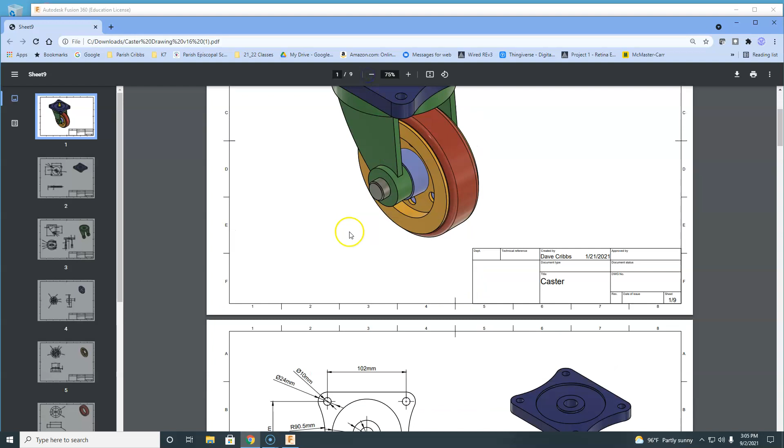All right, this is the third video in the caster project tutorial series. We're going to go ahead, we'll keep moving along. We've already done the plate as well as the frame, and today we'll work on the hub and the rest of the parts.

The hub starts out with just a bunch of circles. There's a 42, a 24, a 60, and an 84. And then there's this ring of circles around that's centered on that 60 millimeter. Those are all 10 millimeters.

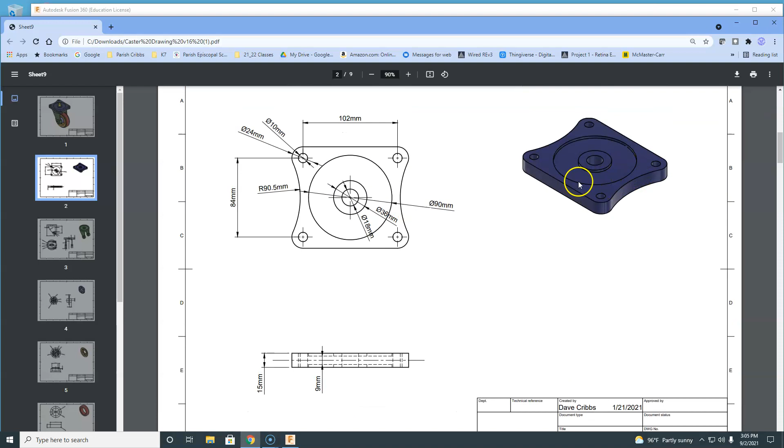So we're going to do a bunch of circles. This piece is more vertical, whereas this top part and these are kind of more horizontal. So instead of sketching on the top plane, we're going to sketch on the front plane.

So I've got my model open where I saved it before. I'm going to go ahead and turn off the visibility to those other parts, hide my data panel. I'm going to remember too that when I'm starting a part, I need to right click and select new component. This will be our hub. Go ahead and hit OK. So my hub is my active component.

Go ahead and hit the create sketch. We're going to use this front plane to sketch on. My first two circles are 24 and 42.

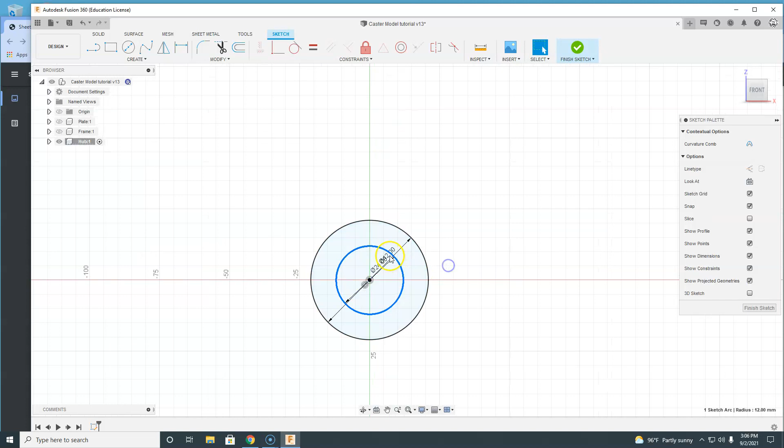So I'm going to use the C on my keyboard to start the circle command. Type in 24 and hit enter. Letter C again, snap it to the origin, 42 and enter. Those are kind of all on top of each other, so I can kind of drag them, grab that dimension and drag it out of the way.

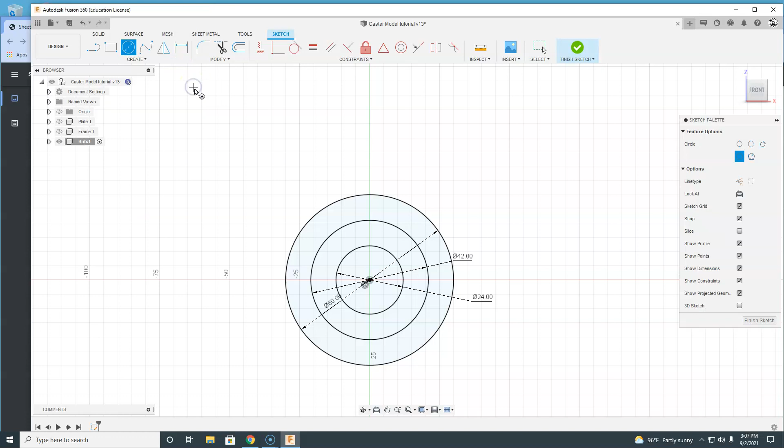Then I've got a 60 and an 84. So C on my keyboard to start the circle command. Type in 60 and hit enter. If you don't want to use your keyboard command, you can always come up here and click on create over the circle and grab it, but you can see it's got a shortcut right there. Center diameter circle is a very common tool. So snap it to the center, drag it out, and then type in 84.

This 60 millimeter circle, I don't actually need this line, I'm just going to use it as a reference. So I'm going to select this line, come over here to my sketch palette, and for line type I'm going to select construction. That'll turn it into a dashed line. The solid lines break up the blue shaded areas, the different profiles, but the construction lines don't. They're just there for reference.

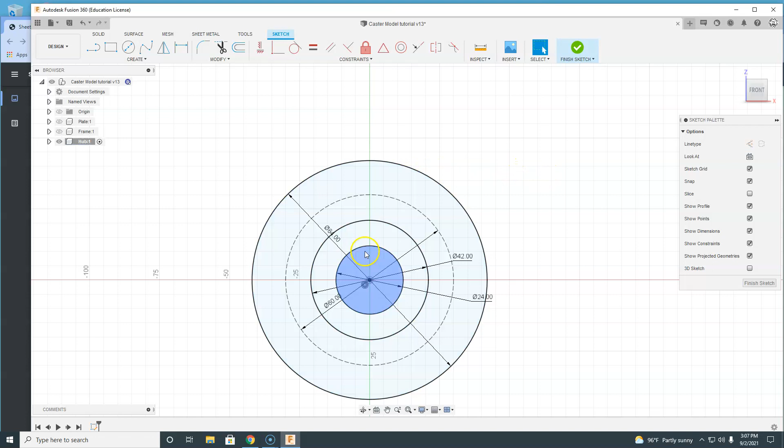I also want a vertical line. I want to put this circle right here, I need to put it straight up and make sure it's at the top of that arc. So rather than just trying to guess, we'll go ahead and put in a line, snap it to the origin, go straight up. You can hit the green check mark. I'm going to hit the escape key to get out of the line tool.

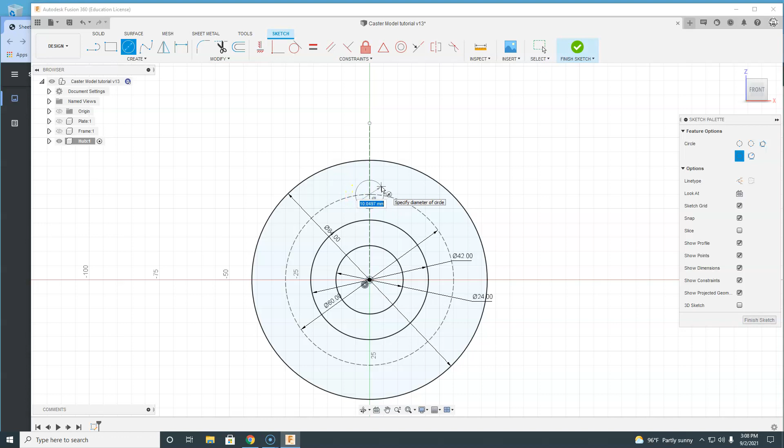I'm going to select this line, turn it into a construction line. That way it's there for reference, but it's not going to get in my way. Hit the letter C on my keyboard for a circle. I'm going to make sure that it snaps not only to this circle, but also to that vertical line. I'm going to drag it out and just type in 10 and hit enter. And that's my top circle.

I've got 5 more, but we're going to go ahead and use a new command. We're going to use the circular pattern tool. It opens up a little dialog box. It's telling me to select my object. So this circle is the object I want. I'm going to select this.

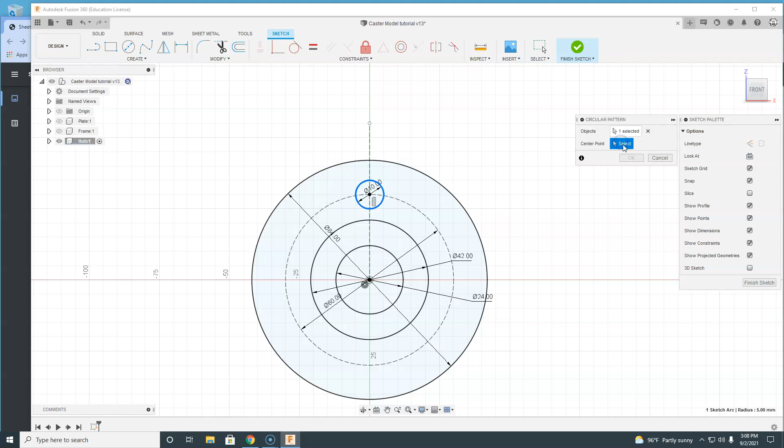So now I need to select my center point as the origin right there. It kind of lights up that circle. Then I've got the option down here that it's going to kind of put in 3 circles, or I can use the up and down arrows, or I can just type in a number. I need 6 of those circles. So I'll go ahead and hit OK.

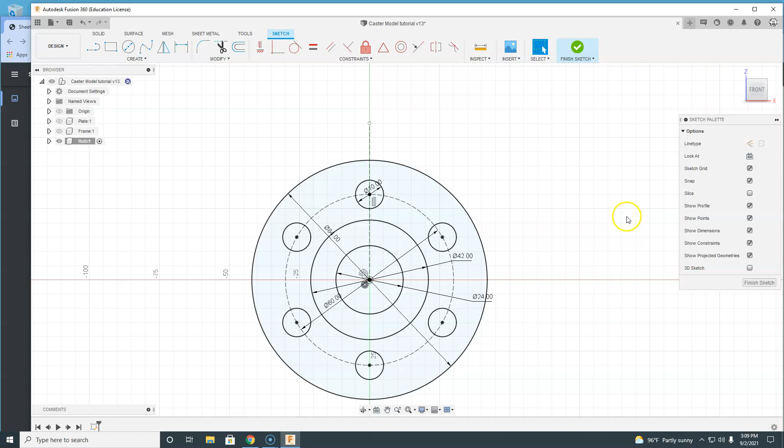Come back over to my view cube, hit the home view so I can kind of get a good perspective view. And when I extrude this, I know the center section is going to be a total of 10, so 5 to the right, 5 to the left. And then this kind of tapered section, and that's what the little 3.5 degree angle is, it's tapered.

It's going to come about 20 from this front face, but my sketch is here in the middle, so I'm going to have to do this 20. I'm also going to have to do half of that 10, from the center out 5 plus 20 more. So this part's going to be 25 from the center, and this will just be 10.

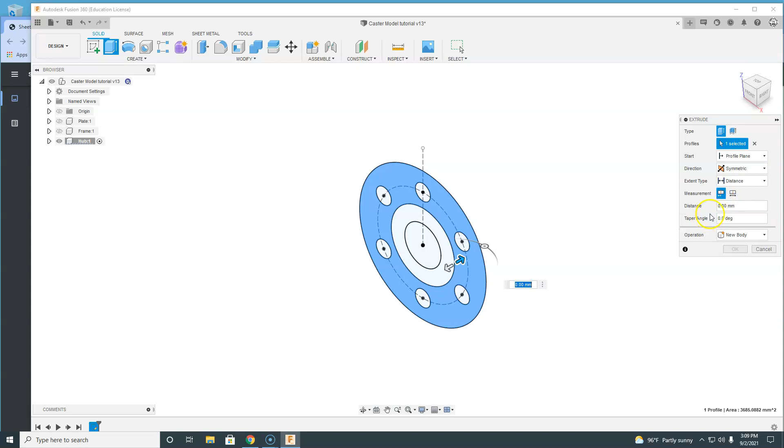Go ahead, start the extrude command. I'm going to grab this outside part, and I know that I want to do symmetric at both sides, and I know that the whole distance has got to be 10. So we'll do that.

Whenever you finish an extrude, it hides the sketch, so we'll just go ahead and turn that back on. Start our extrude tool again, grab that inner circle. That is also going to be symmetric.

And we said the half distance, if you remember, is 20 plus that 5. So the half distance is 25.

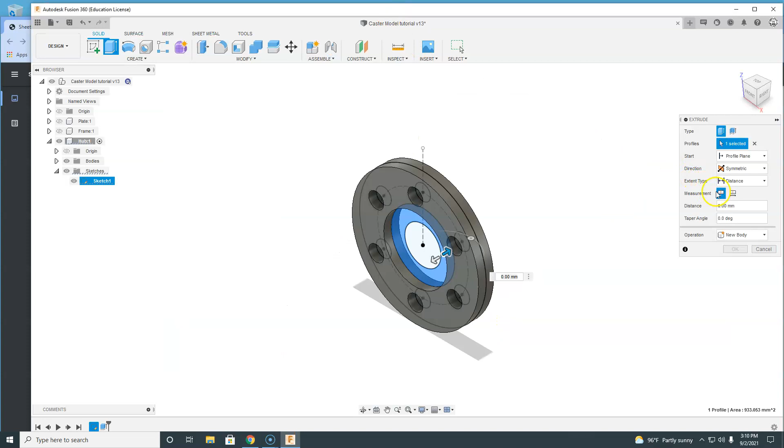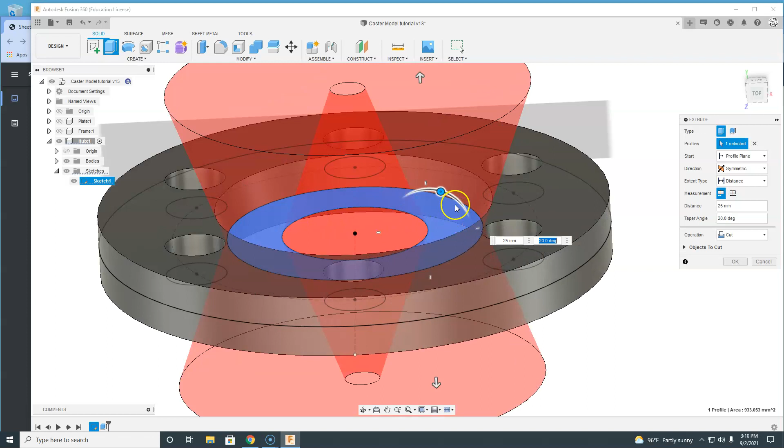And then we also have to remember the taper. If I look at this from the top, you can kind of see if I drag this inward, it gives a different taper. If I drag it outward, it kind of explodes and goes crazy. It's thinking we're trying to cut a hole inside of here, which is not at all what we're trying to do.

So we're going to drag this taper over this way. It's always a little bit tricky to get those things with the mouse, so we're just going to see that it's the negative direction. We're going to type in negative 3.5, I believe, yeah, 3.5 degrees.

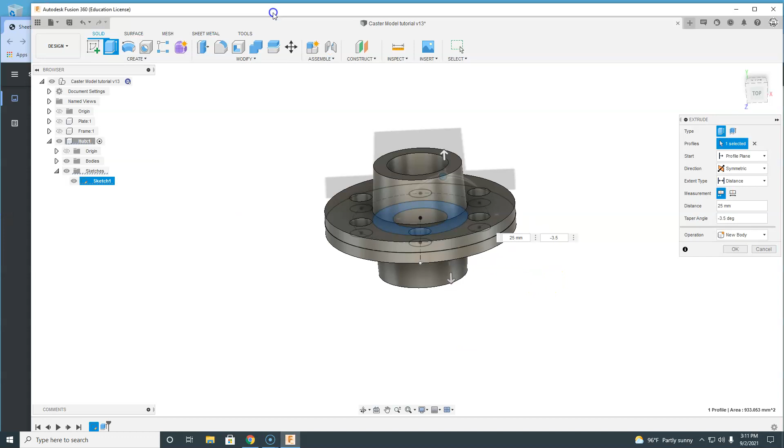So we'll go back to our home view. That looks good. Instead of new body, I'll make sure I select join so that those things are attached to each other. Go ahead and hit OK. We'll turn off our sketch, and that looks good to me.

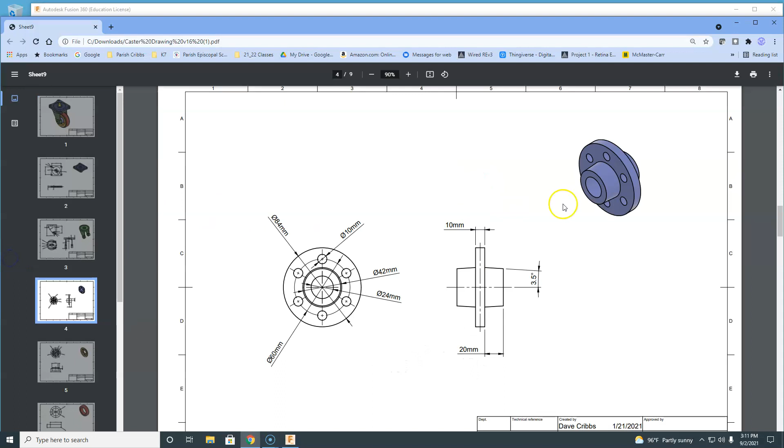We've got, I don't know, some kind of light purple color. So I'm going to go ahead and hit the A on my keyboard, bring up my appearance menu. I got purple because I did it when I was practicing, but you're not going to have that right away.

So I'm going to come down here to glass. Whoops, not glass, paint - glossy paint. And there's no light purple, so all I did is I right-clicked on this blue one. I'm going to duplicate it. It gives me another blue one. Right-click on the new one and hit edit.

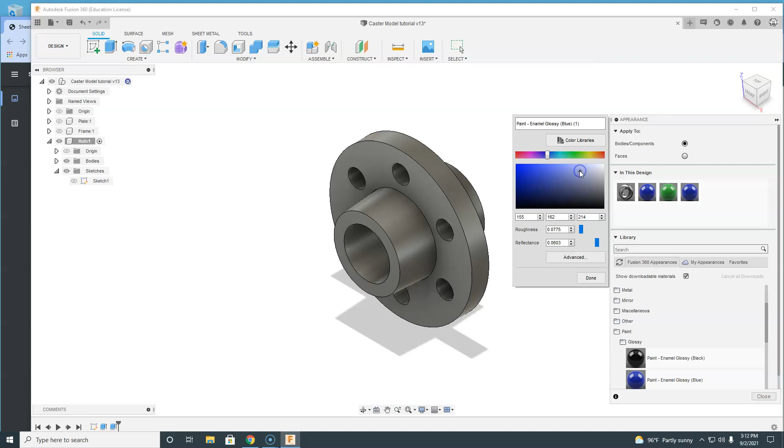And then you can kind of pick whatever color makes you happy, some kind of light blue, light purple, whatever you want. I'm going to hit done. Changes it to that lighter color. This is on bodies or components, so I can just click this, drag it to the whole thing, and voila, some kind of light purple. So I'm going to hit close.

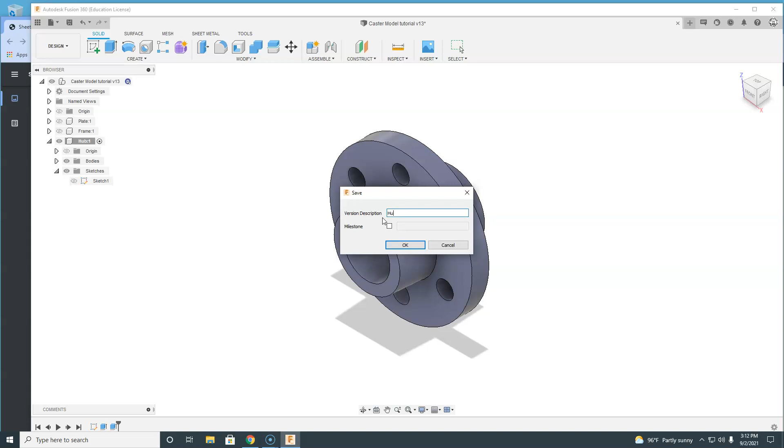We're going to go ahead and save this. We'll call this the hub. If I could spell... okay, or I should say type. So that's our hub component.

Pretty simple. I'm going to go ahead and minimize all of these. I can turn on my other components - you can see they're all on top of each other. Since the hub is activated, it's the only one that's displaying solid. The other two are kind of translucent.

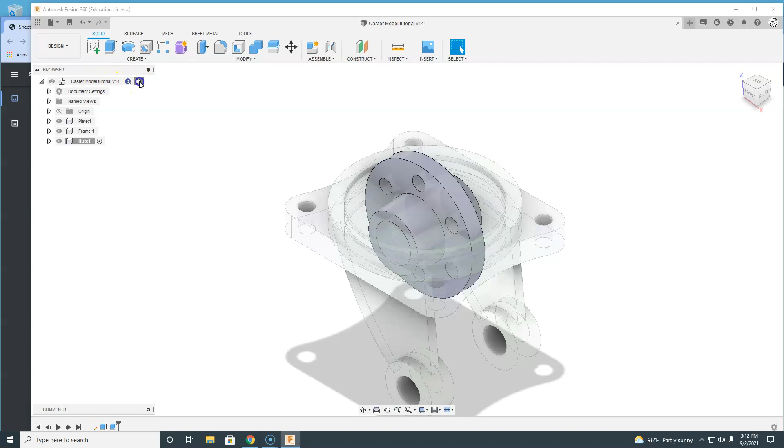If I come up to my top level design and activate that, kind of click in the white space, you can see that all three of them are there on top of each other.

So we're going to go ahead - that's the hub, we'll come down here to the flange. This is going to be my next component. So we'll come over here. Once again, a bunch of circles.

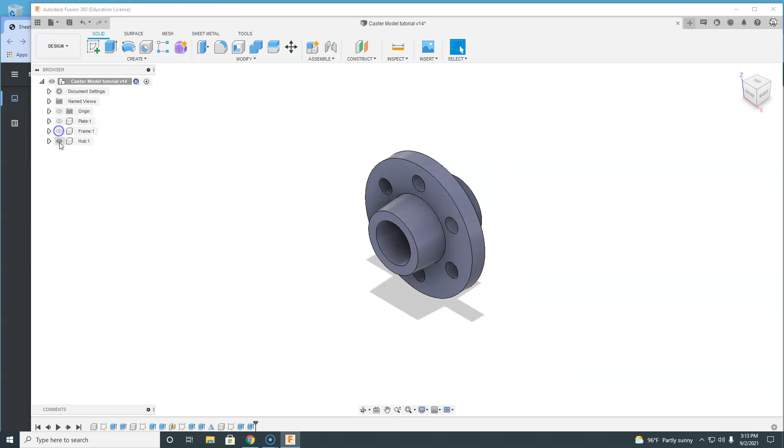I'm going to turn off the visibility on all of these. I'm going to right-click, start new component. We'll call this one flange 1. We're actually going to need 2 of these. So I'm going to hit OK.

For our sketch plane, this is kind of oriented in the vertical plane as well, so we'll select that XZ plane. I know I got a couple circles, so we'll start with the 41 and the 60.

41.5 and 60. C for center circle. Snap it to the origin, drag it out, and just type in 41.5 and hit enter. C for circle again, snap it to the origin, pull it out, and type in 60, hit enter.

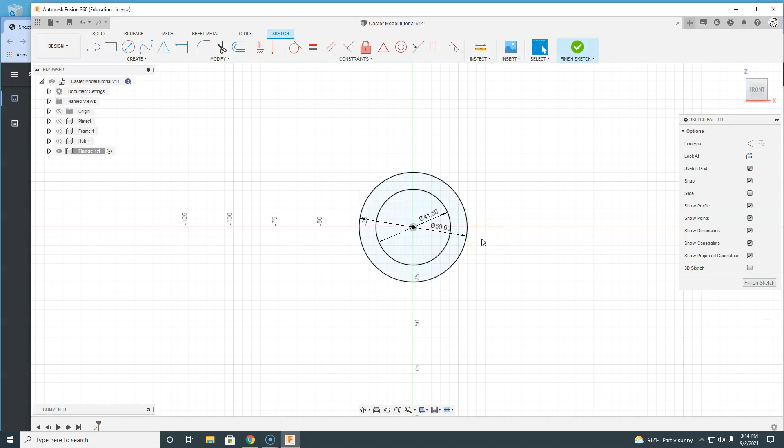41.5 and 60. I got an 84 and a 78. C for circle, snap it to the origin... I forgot already, so sorry.

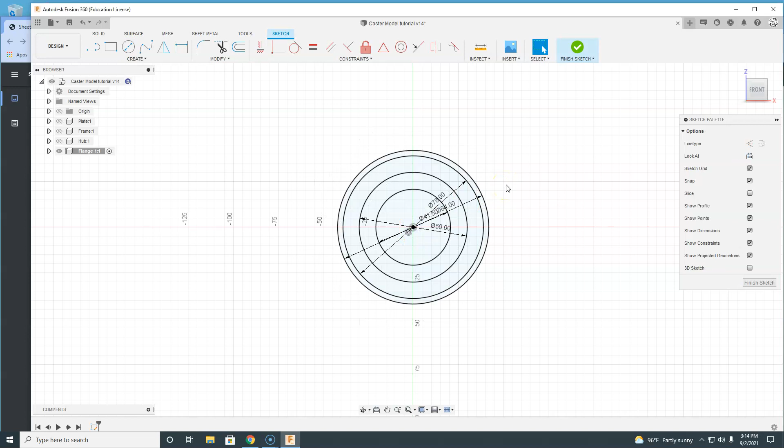84, 78 and 84. So, sorry - 78, hit enter, circle, snap and pull it out, 84. And then one last one, 108. So C for circle, snap to the center, pull it out, type in 108. These are kind of all over the place, so I'm going to pull these out a little bit, maybe where they're not so all on top of each other.

But these holes right here should be 10 millimeters as well. So let's go ahead and turn this 60 right here that comes out to this circle - that's the 60. We're going to turn this one into a construction line, same way we did before. We're going to add in a vertical construction line. I'm going to make sure I select it first and then turn it into a construction line.

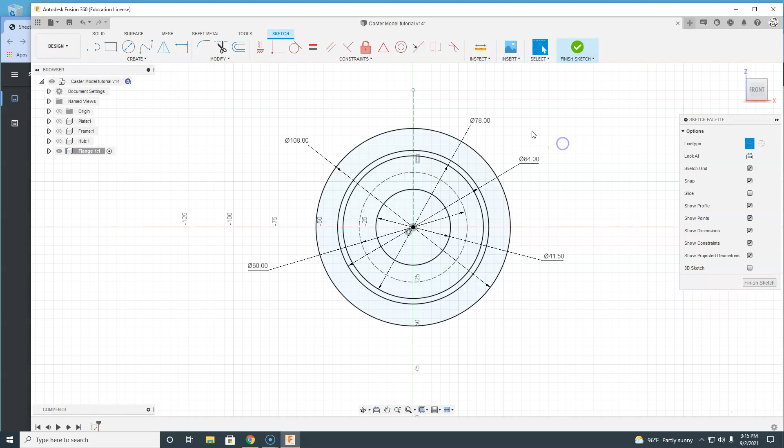We'll do a little 10 millimeter circle. Make sure it snaps to both of those, type in 10 and hit enter. Oops, this was still on construction line, so let me select this and unselect construction. So now it's just a normal line.

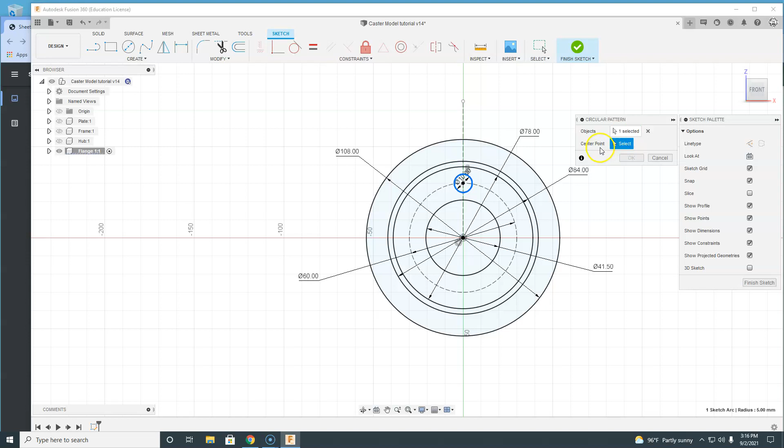And then we're going to do our same circular pattern tool. It's asking me to select an object, so I'll give it that. I'm going to select the center point. Come down here, and instead of 3, I'm just going to type in 6 and hit enter. And I've got all 6 of those.

So we'll finish that out. I'm going to come over here to the home view, so it's kind of at an angle, get a little bit better view of how I'm going to extrude this. We'll start with this very back plate over here.

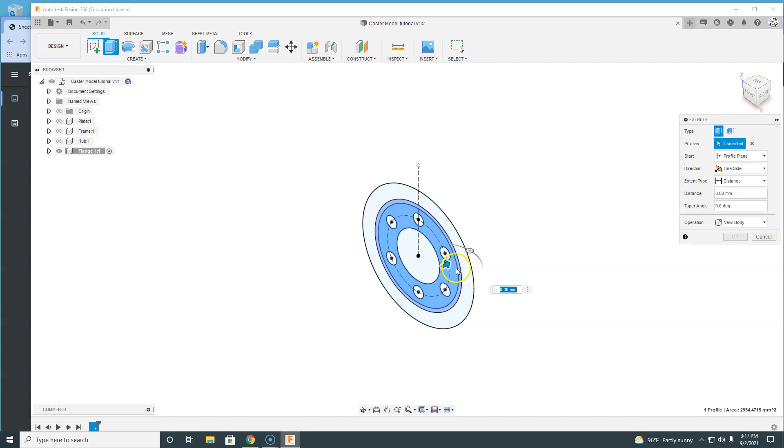I'll start the extrude command. I'm going to grab this piece. It wants to go back that way, but I want to have it come out the front - that's the negative direction. So I'm just going to type in -3 and hit enter.

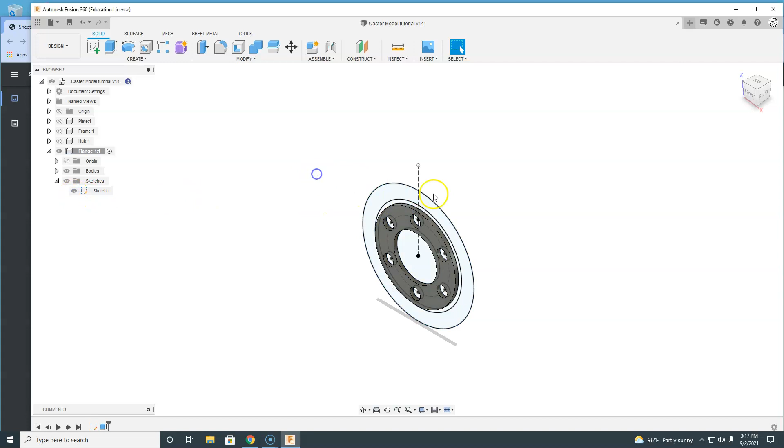Come over here and we'll turn that sketch back on. This thin section right here, if I can zoom in and grab it, that's going to kind of be the sidewall - this portion right here. So from my sketch, it's going to come all the way up here to the front. So from the back to here is 11.5, and then another 3 millimeters.

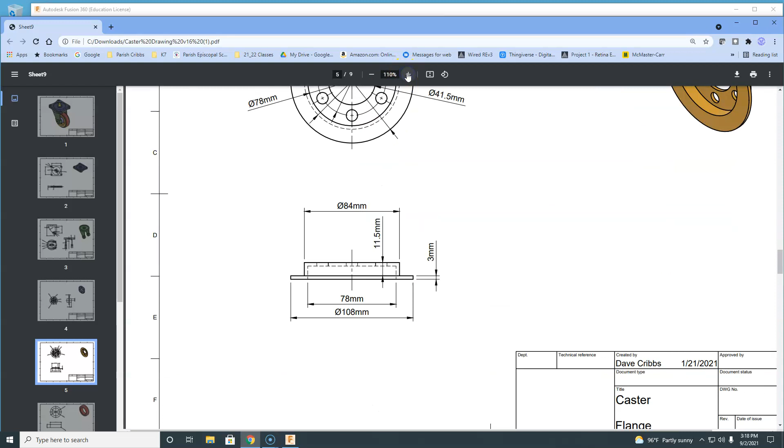Let me kind of zoom in on that a little bit, see if that's easy to see. My sketch is right back here along this line, so I'm going to bring this all the way out to here, which is 11.5, and all the way to the front, which is going to be another 3. So from this back part to the front part, I have to add those two together and get 14.5. So I'm going to start my extrude command again.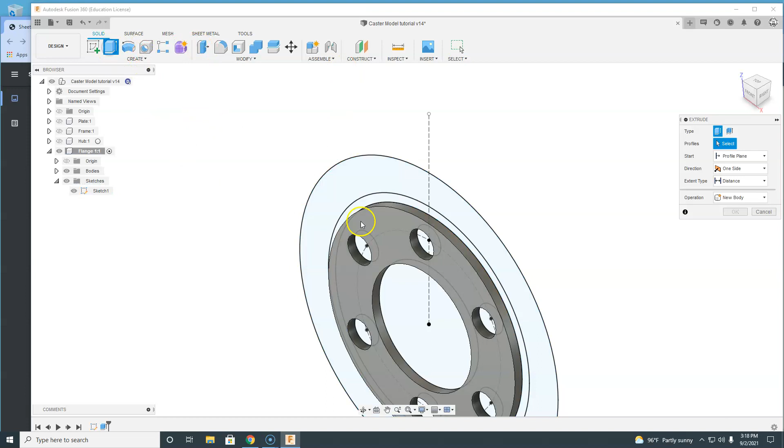I'm going to grab this - same thing, I'm just going to grab this direction arrow, kind of pull it the direction I want to. It tells me it's the negative direction, so I'm going to type in -14.5. I'm going to put it right there.

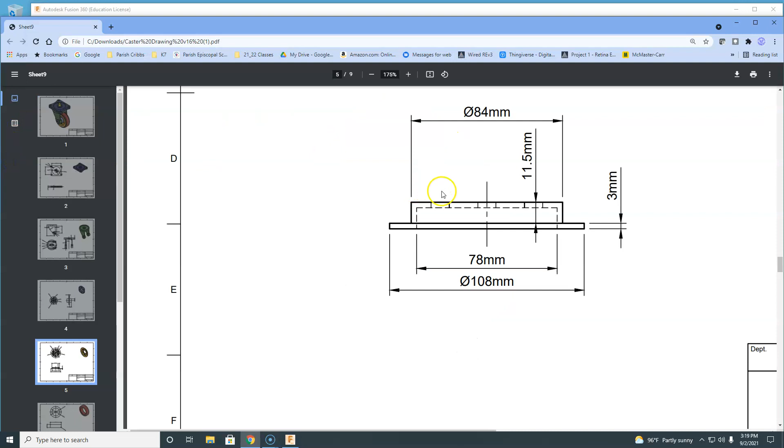And then the last section, I need to do this front part of the flange. We kind of zoom back out here - you can see this face right here. It's even with this sidewall, but it kind of goes back in a little bit. I already know that I've got this front face, and it kind of goes backwards 3 from the front face.

So I'm going to start the extrude tool again. I'm going to select this profile because that's what I want, but I don't want it to start back there - I actually want it to start up here. So there's a start option, and instead of profile plane, it's asking me if I want to do an offset.

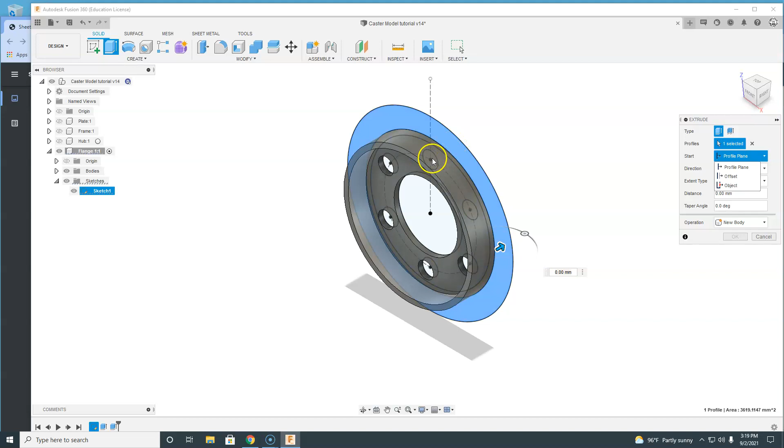I could do the math and figure out where that is and have it come forward to here, or I can just click on object and say I want to start at this face, and then from that face I want it to go back 3 millimeters. So I'll type in 3. Join is what I want. I'll hit OK. And that looks really good.

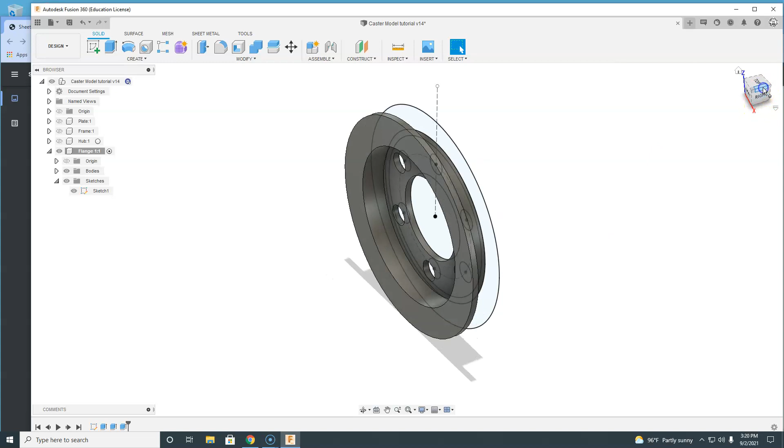Okay, I'm going to turn off my sketch. So you can see there's that back plate that we did 3 millimeters forward. Then we did from back here all the way up to here, the 14.5. And then from here back 3 millimeters the other way to get that flange. So a little bit of backwards and forward on the flange, but nothing too difficult.

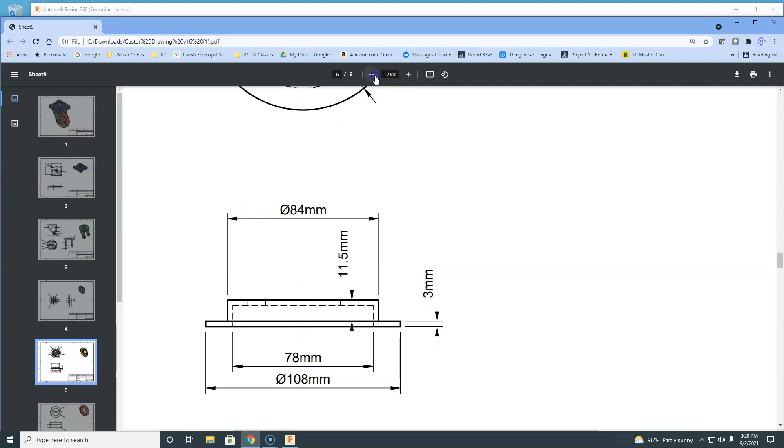So let's put a color on this. The flange is kind of that gold color. I'll hit the A key on my keyboard for appearance, pick yellow. Sure, good enough, we'll hit close. I'm going to go ahead and save this. And this is the flange. We're good to go.

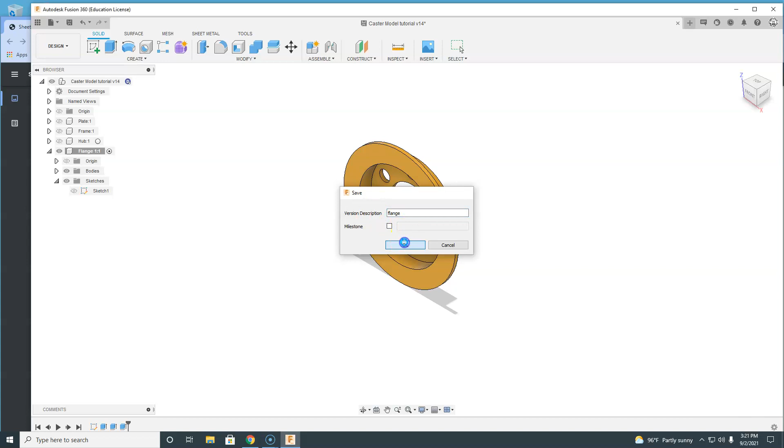Now I'm going to need 2 of these in my model. So I can come up here and go to my top level, activate my top level model. This is the only part that I have visible. I'll right click on this and click copy, then left click to get out of that menu. I'm going to right click in white space. Let me click up here to make sure I'm active up here.

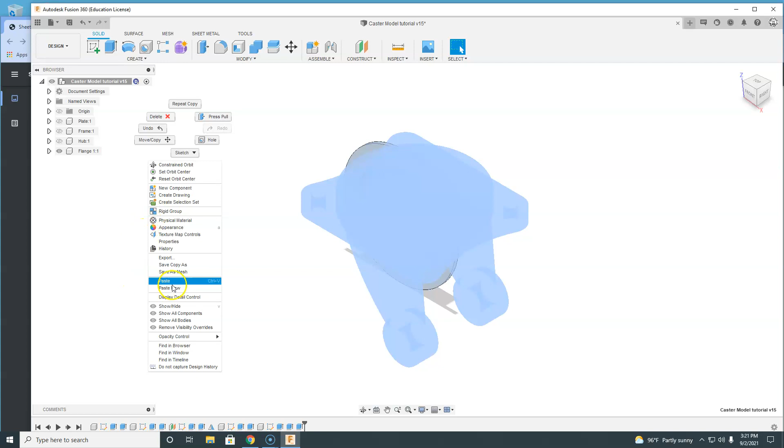I'm going to right click, and I've got 2 options. I can either paste or paste new. If I use paste, then flange 1 and flange 2, if I make any changes to flange 1, those exact same changes will happen to flange 2. If I do paste new, it'll start out the same, but they won't be linked. I know these 2 things are going to stay the same the whole way through, so I'm just going to click on paste. It's going to stick it right on top of the other one.

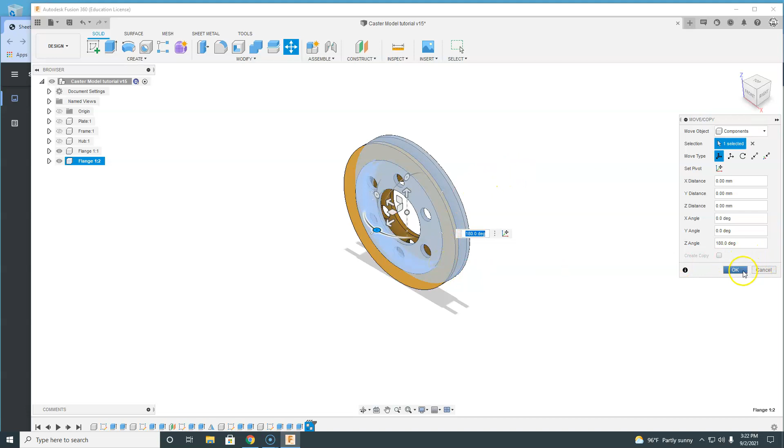I know I want this one to face the opposite direction, so I'm going to grab this disc right here and spin it around 180 degrees so it's facing the opposite direction. I'll hit OK. And now I've got flange - it's still flange 1, just the second occurrence of that flange. So there's kind of 2 of them, both gold, sitting on top of each other. We'll go ahead and save that and say OK.

So we got our flanges. Next thing is this little tire section, just a couple circles - that should be pretty easy. We'll close out the visibility on those.

Make sure our top level is activated. Right click, new component, we'll call this one tire. Once again, this is kind of on the vertical plane. I've got 2 circles, an 84 and a 120.

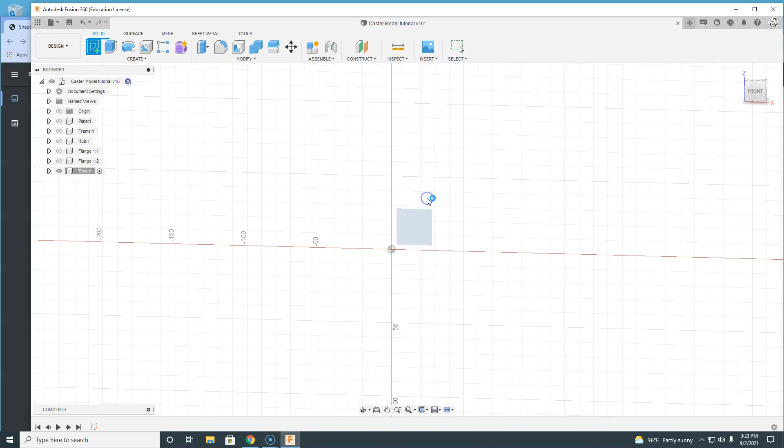So I'm going to start my sketch on this side plane. Do C for circle, an 84, C for circle again, a 120. Okay. We'll get a little bit of a round on here, so we'll show you how to do that. But the first thing we need to do is extrude this out to a thickness of 33. So we'll finish that sketch.

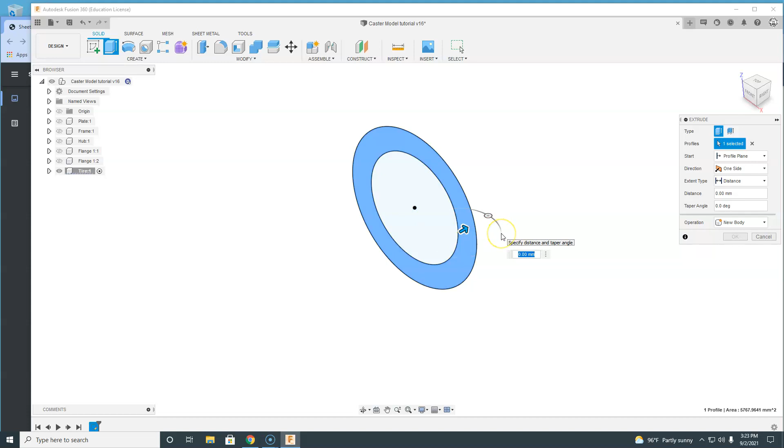We're going to select this to extrude, and we'll just type in 33. Start out with new body. That's great, and hit OK.

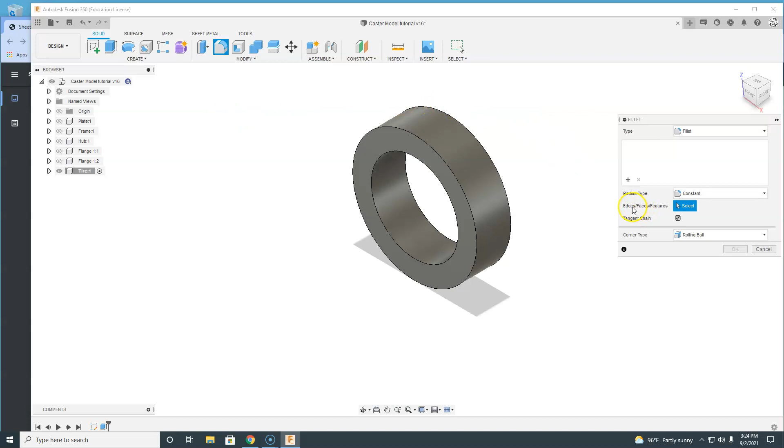To round these edges, it's only these outside edges - the inside edges are sharp. It's only here on the outside, top and bottom, that we have that round, and it's a 5 millimeter round. So to do that, we're going to come over here to the modify command. We'll use this command right here, called fillet. We'll select that. It's going to ask me to select an edge, face, or feature.

We want to select an edge. This is already highlighted to select. So I'm going to grab this edge right here - it highlights it in blue. I'll also grab this edge right here, highlight that in blue, so it's got both of those. It's got a dialog box highlighted, so I'm going to type in 5. And I just rounded my wheel. I'll go ahead and leave all those things the same.

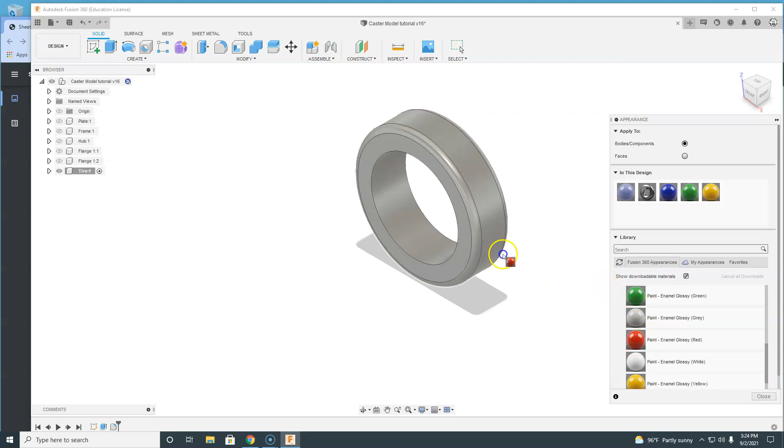Hit OK, hit the letter A for appearance. I think this sucker was red, so we'll grab that, drag it on there. Boom, that was easy. Go ahead, hit save, and we'll call this tire.

Okay, I'm going to go ahead and turn that one off. I'm getting ready for my next component. I know I've got another one coming. So the tire is done.

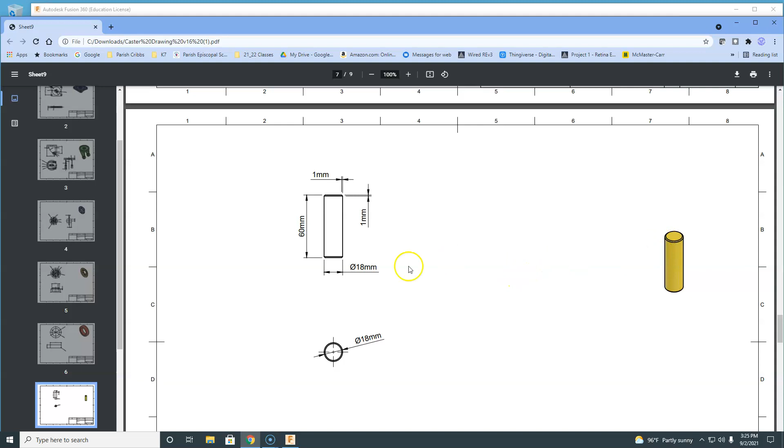This is the Kingpin. This is going to go vertically into our caster. So once again, this is 18 millimeters, and 60 millimeters long. We've got a couple of little chamfers here, not rounds, you just slice those off. It's 1 millimeter by 1 millimeter on the top there, but to the outsides it's going to be 18 by 60.

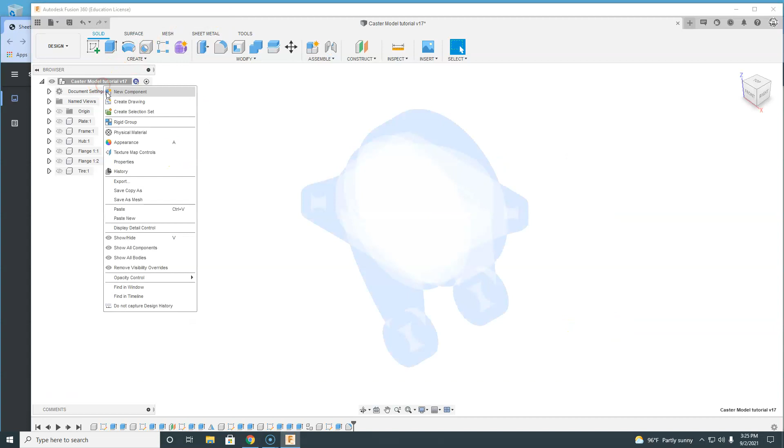So right click, new component. We're going to call this one Kingpin. Okay, this one was kind of vertical, so we create our sketch. We're going to grab this top sketch plane, and we're going to do a center circle that is 18. Finish the sketch, that's all there is to that one.

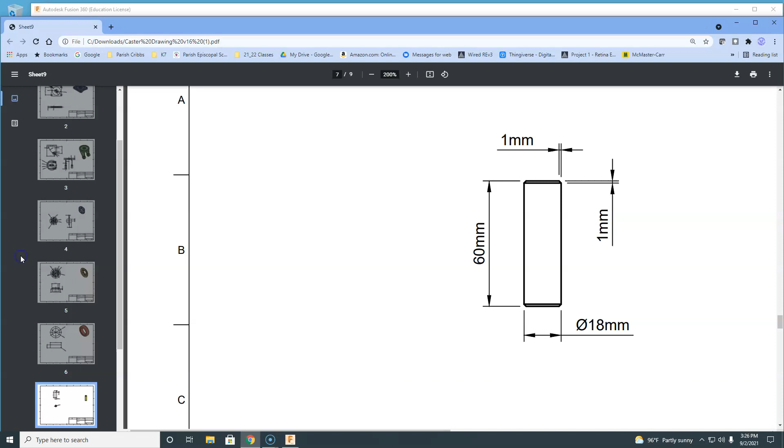I'm going to extrude this one, and I think it was 60. Let me double check. Yeah, 18 diameter by 60.

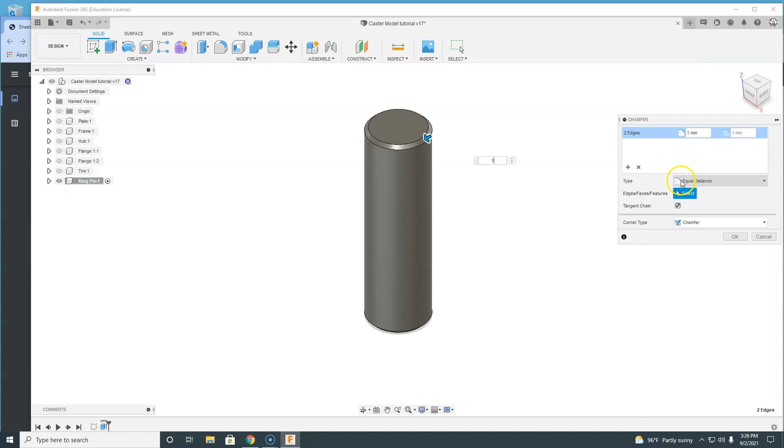So that's easy, and then instead of grabbing the fillet tool to put a rounded edge, we're going to click modify, and we're going to do chamfer. Same thing, it wants me to select an edge or face, and it's got this equal distance option selected. So I'm going to grab the top one and the bottom one. Same thing, it's got the 1 millimeter, and I'm going to set the equal distance. That 1 millimeter is what we want. Okay, so we'll go ahead and hit OK right there.

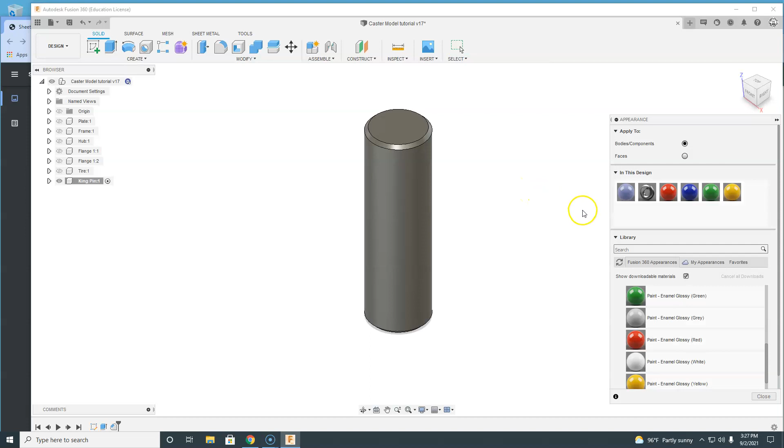What color is this? We gotta zoom out. Yellow, okay, we need a different yellow than before. So I'm going to hit the A key, I'm going to grab this yellow. Oh no, I need to duplicate it, I need to right click and hit edit. And then we'll slide this down a little bit. Oh, there you go, that's nice and obnoxious. We'll hit done, and we'll apply that kind of yellow to it. There you go, that's a winner.

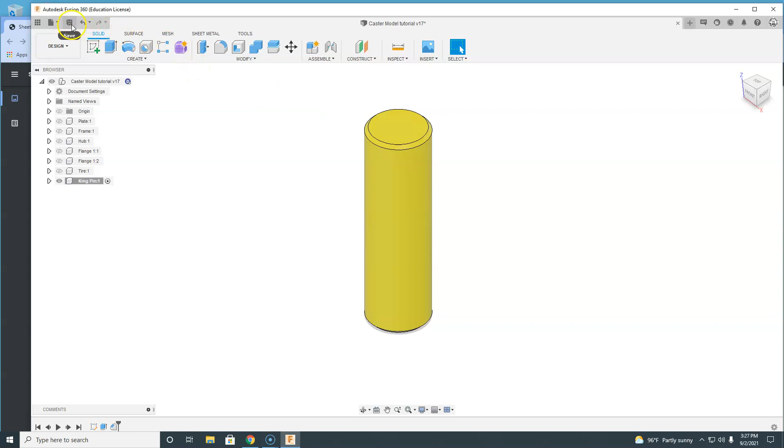Close, I'll go ahead and save that one. That was the Kingpin.

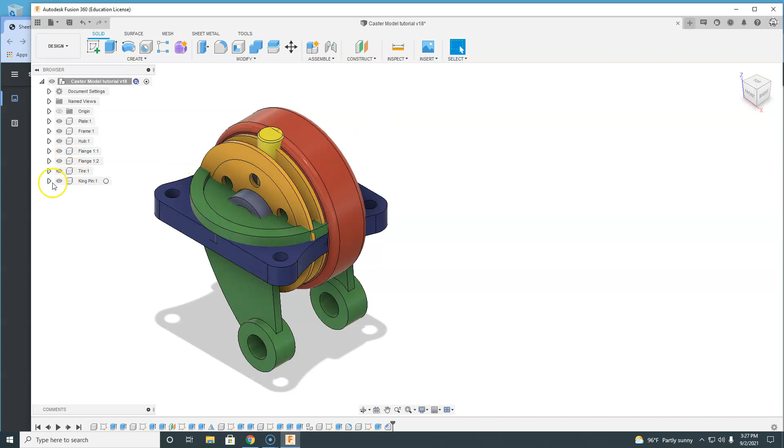And hit OK. So at any time you can go back and see all these things we got going on, they're kind of all over the place. If you go to our top level, you can see all the pieces you made, they're kind of all right there on top of each other. I think we've just got 2 more to go.

Okay, we've got the shaft and the bushing, and that's it. Okay, shaft, same thing. This is going to be 18 by 104 with a little 1 millimeter chamfer, and 18, and this is hollow in the center. Okay, we'll just do one at a time, we'll work on the shaft, 18 by 104.

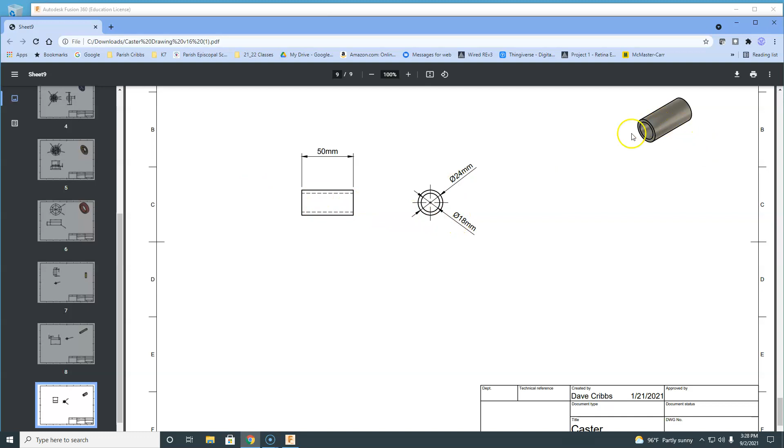Make sure that your top level is activated, right click and hit new component. I'm going to type in shaft as my component name. Hit OK.

I'm going to go ahead. What is it? That's kind of horizontal, so I'm going to do my sketch plane on this front axis. Circle, center, I'm going to type in 18. Finish my sketch, start extrude. Type in 104. There we go.

I'm going to start up the chamfer tool again, grab that edge and type in 1 millimeter. Okay, yeah it says 2 edges, I couldn't tell if that got the chamfer or not. I'm going to hold down shift on my keyboard, hit the middle mouse button, I'm going to rotate. Oh, and really hit OK.

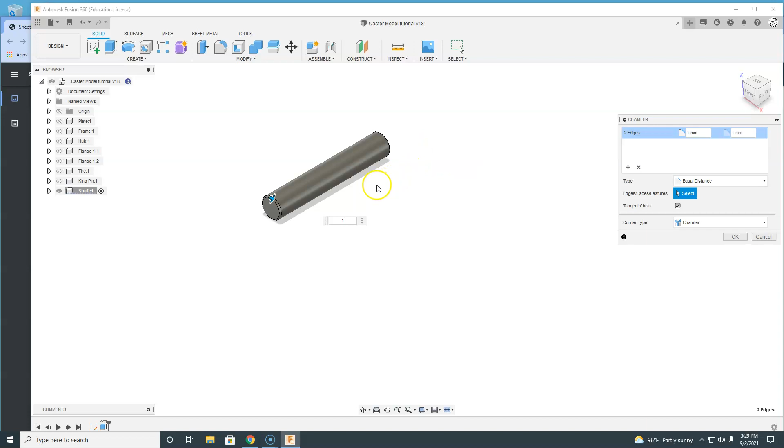I'm going to hold down shift, the middle mouse button on my keyboard, you can rotate and see what that is. I'm using a 3-button mouse, that kind of helps. If you don't have a 3-button mouse, quick setup will tell you how to do it. I've got a mouse, and it sees I've got a mouse plugged in. If you're using a trackpad, when you click on the quick setup, it'll let you know how to do stuff on the trackpad. Okay.

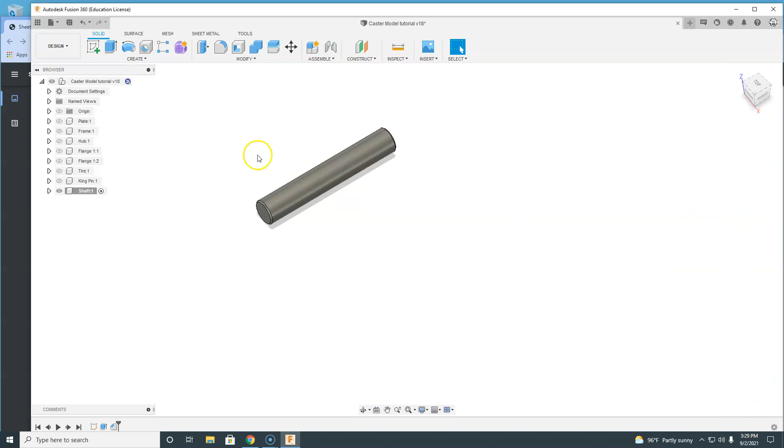So that's my shaft, I need a color for that. Ooh, we just left that as silver, great option, I love that. We'll go ahead and hit save, call that shaft.

Let's come back up here and activate my main component. I'm going to hide the visibility, and come down here to my last piece.

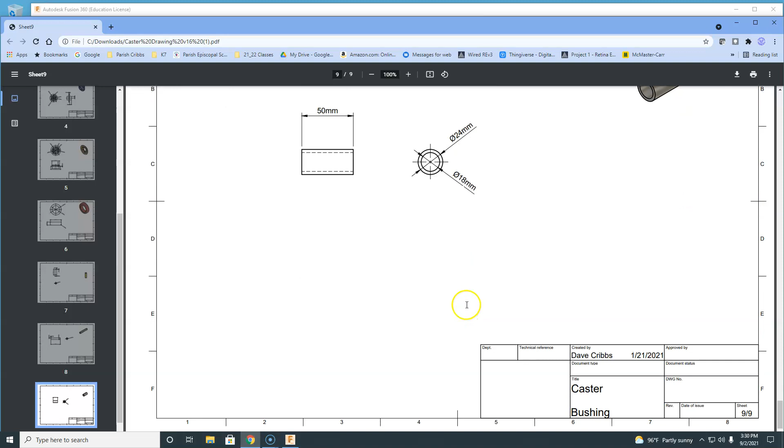So come up here, right click, do new component. This is my bushing. Go ahead, hit OK, and create a sketch plane on this front cube.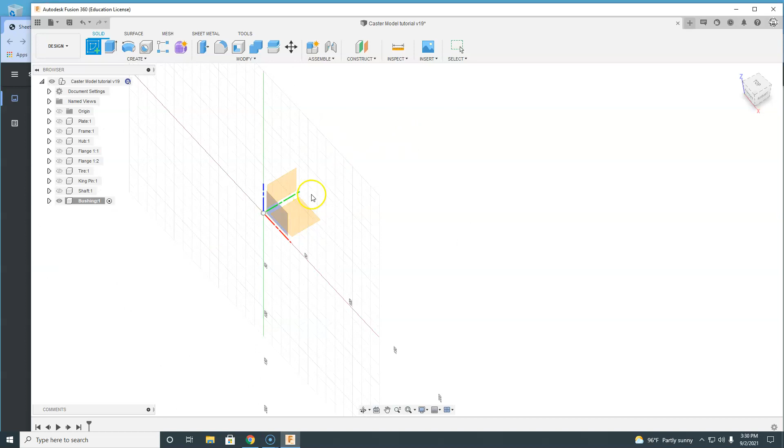I'm going to go back and... oops, daisy, why is it being weird? Oh, I already got my sketch plane selected. So I'll come up here and select the front plane. Okay, it is acting weird, I don't know why. Oh, there you go, I finally selected the sketch plane.

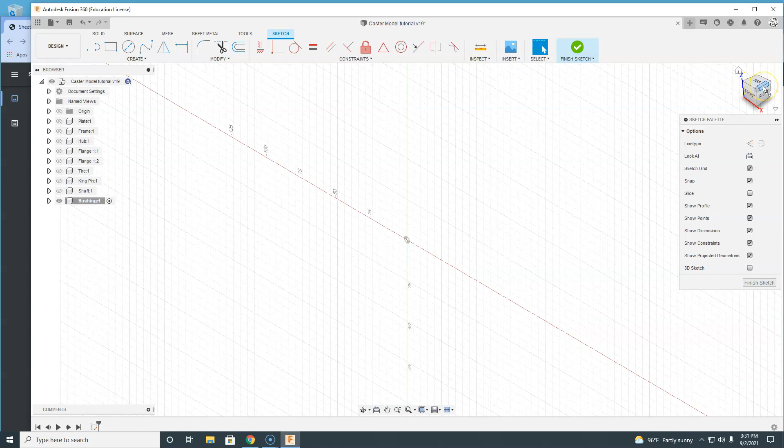Let's come up here to the home view. If I click on the corner here, I can kind of see that that's right on that axis. If you're ever in doubt, you can turn on your origins and you can see. I don't know why it's not going to the home view - it should be that kind of isometric view. I don't know why it's not going. My Fusion is freaking out 25 minutes into the video.

All right, I'm going to hit Finish Sketch. Let me see if I can save this. I'll do the bushing here in a second - I want to make sure I don't lose everything.

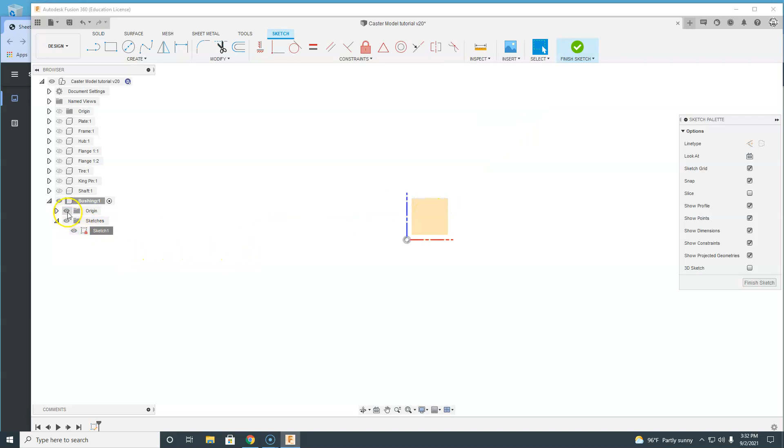Bushing. Okay, so real quick, I'm going to expand that, right click and edit that sketch, and turn off my origin plane. My grid is gone, I don't know what's going on. Let me come down here to snap to grid settings. Everything looks like it should.

All right, we'll keep working. That should be my origin. I don't know why I don't have the axes of the grid in the background, but we'll just roll with it. I'm going to do my center circle. I still have my... I thought that was my origin right there. Yep, I'm going to escape out of that.

Finish sketch. I'm going to go ahead, right click, and delete that sketch. I don't know why I don't have the graph paper in the back. All right, we'll try one more time. We're still active right here. Create sketch - my origin's not showing up.

Okay, so I'm going to go ahead and pause the tutorial. I'm going to restart Fusion and restart my computer, and we'll see if we can pick it up here in a second. Okay, so I restarted Fusion - I just closed it, waited for everything to save, started it up again. We'll see how things work now. Sometimes it gets a little wonky and you just got to restart it.

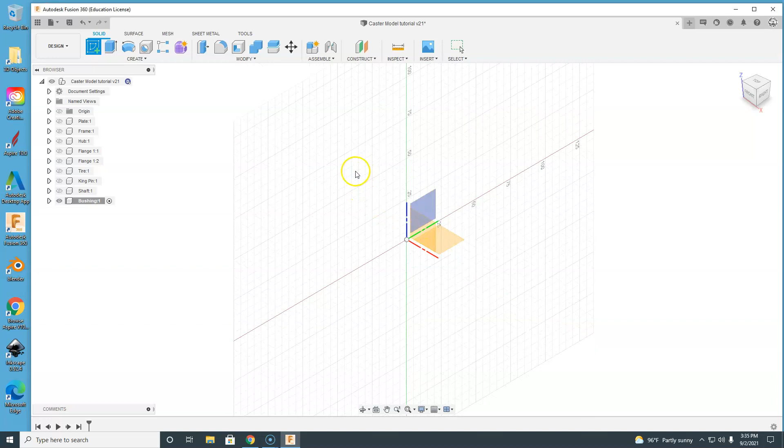So I'm going to hide the data panel, the bushing right here. I'm going to make sure that I click that dot to activate this as my component. We're going to select - there you go, fantastic. So there's my grid plane and everything. So click that face. Where's my drawing? Right there - 18 and 24.

So if Fusion ever starts acting weird, make sure you got everything saved - that's why we save all the way along. You need a minimum of 6 saves, I'm already up into the 20s. So for a big project like the caster project, it's not an issue. But we'll go ahead, keep going.

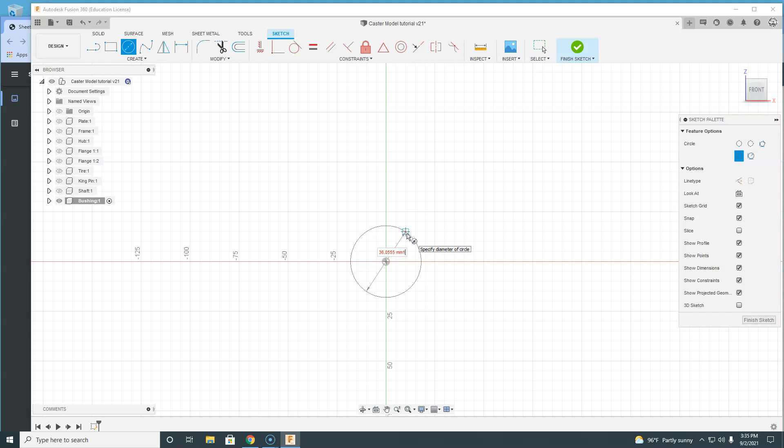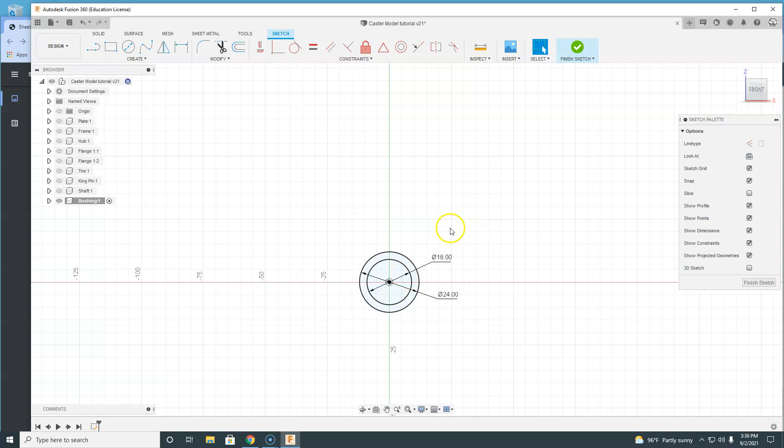I got an 18 millimeter circle. Okay, C on my keyboard, 24 millimeter circle. I'm kind of just going to zoom in. If you've got a 3-button mouse, it makes Fusion a whole lot easier rather than just a trackpad. So I'm going to go ahead and finish that sketch, go back to my home view. That's working good again, okay, makes me a whole lot happier.

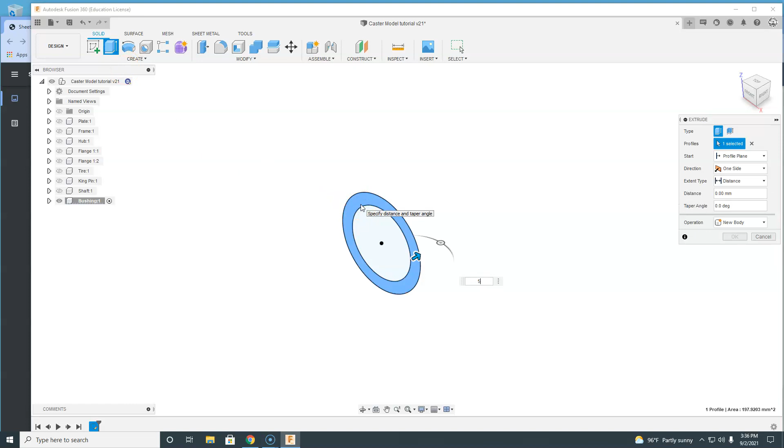And 50 millimeters long, and there's no chamfer on this. So it's just 18, 24, and 50. So extrude this 50 millimeters and hit OK.

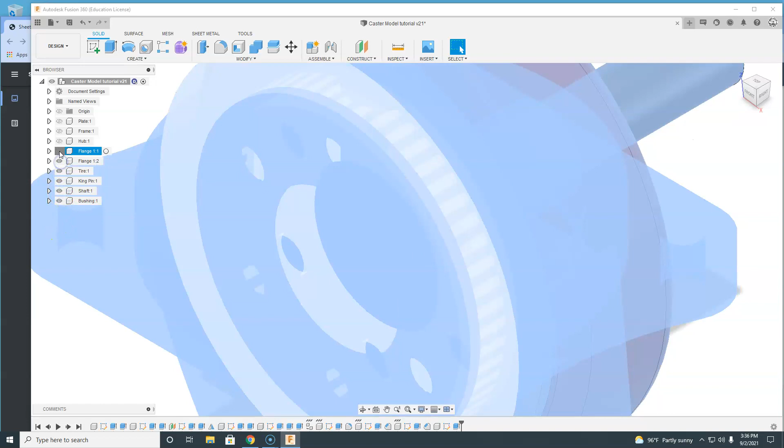And I think the bushing was silver as well - that's going to get hidden inside our caster. So I can come up here, do this. I got my top level model activated. I can turn all of these on so I can see all of my components. Kind of zoom out and click on the white space, and it's kind of a hot mess, but they're all right there.